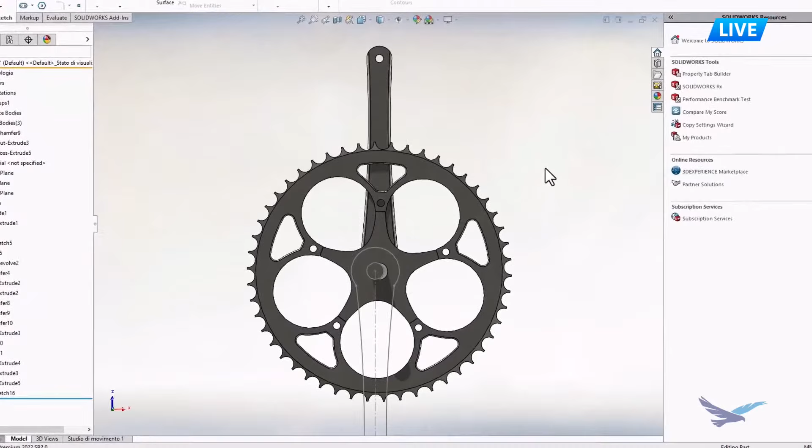Looking at the first two, again, minimizing our mouse movement. One way to do that is with the shortcut bar, clicking S with your keyboard. From here, I can customize this to the features that I want. I can resize it. Maybe you want it to be a little bit more of a square or rectangle. We can change it, and then begin to populate this.

But you see that there's a command search now available. If you haven't used command search before, as long as you know the name, for example, maybe I'm looking for a center line, maybe they've moved it. This does one of three things. I can click on the eye to show the command location, it'll have an arrow there, or I can click on it to activate it.

Or I can even left click and drag it to my command manager and customize it if it's a frequently used feature. Now that same functionality is right in our command search. I can do that same thing, click on that plus button to insert the command, or click on the eye to show the command location too. If you prefer dragging and dropping, you can do the same thing to customize your shortcut bar.

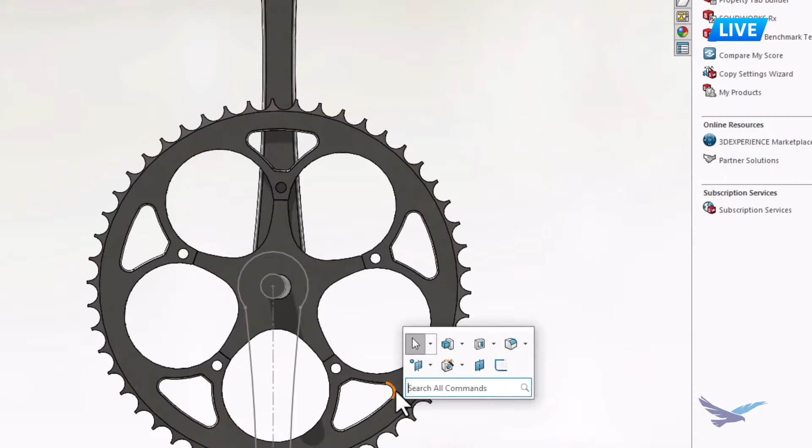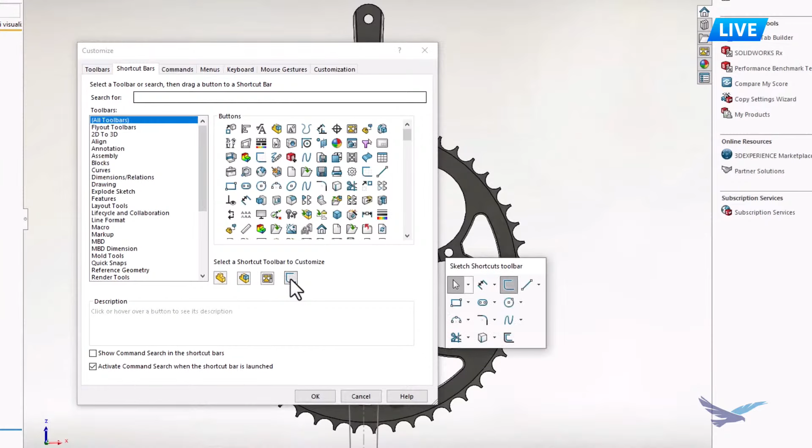Now say, for example, you know where everything is, right? I even forget where things are. But you can go into Customize and turn this off. If you decide you don't want that in there anymore, it's taking up space, you can go ahead and still resize it as you need. Keep in mind, in this Customize is where you're going to add additional features onto there, whether you're in a part, an assembly, a drawing, or even a sketch—it's context sensitive. So that's our shortcut bar, and then also our command search.

But I also wanted to show one other thing here too, different ways that we can draw lines, different kinds of lines. So we can activate our line tool, and one thing to pay attention to here is if I click the Alt key, there's an underline now on some of the letters. If I go Alt H and Alt C right now, I can create a horizontal construction line, a keyboard shortcut instead of having to toggle it. That same functionality is also going to work if I want to apply relations.

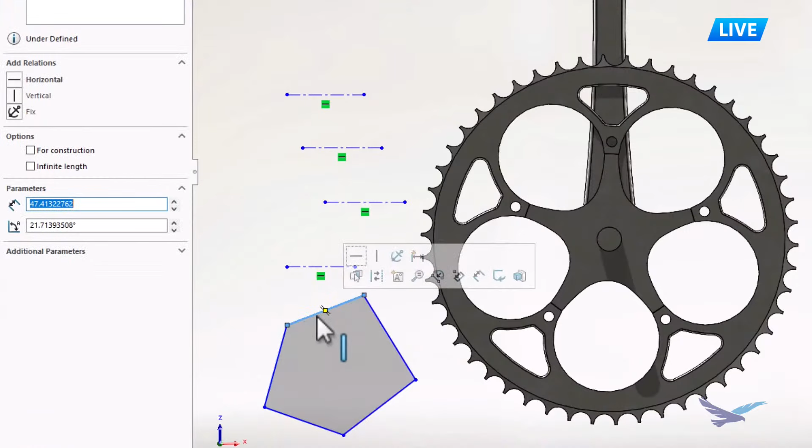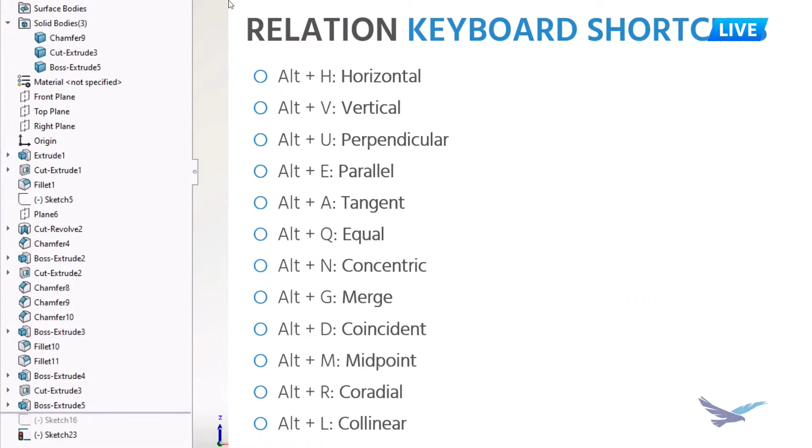So say, for example, I'll do an as-sketched profile. We'll sketch out some of these lines with the point-to-point click. I'll click on this line, and if I do that same thing, Alt-H, I can make this line right here horizontal. I can obviously click on the context menu to make it horizontal too—this is just another way to get that done. So here are some of the different shortcuts we can have for our relations, like perpendicular, parallel, concentric, midpoints, and so forth.

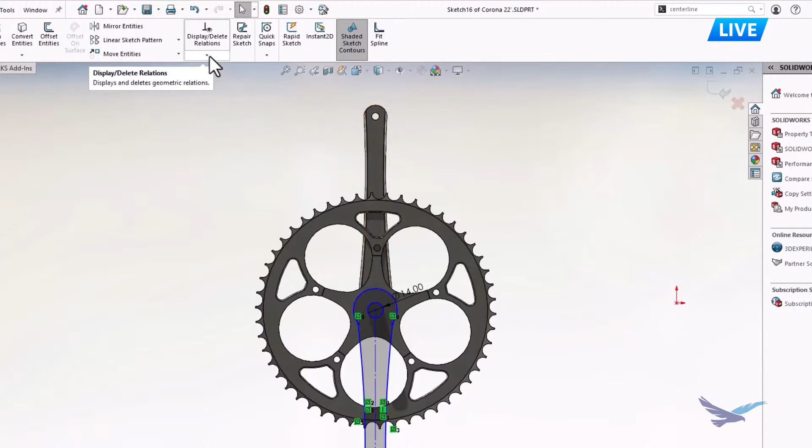From here, we're going to take a look at number 3, fully defined sketch. So editing this sketch, we have some dimensions in here, but if I want to just quickly add dimensions, I can go to the drop-down menu here and go fully defined sketch. This is especially useful when you want to quickly add some relations—you can choose which ones you wanted to infer, and also choose where it's dimensioning from, both horizontally and vertically. Once you do, I can press the green check and it adds those dimensions in.

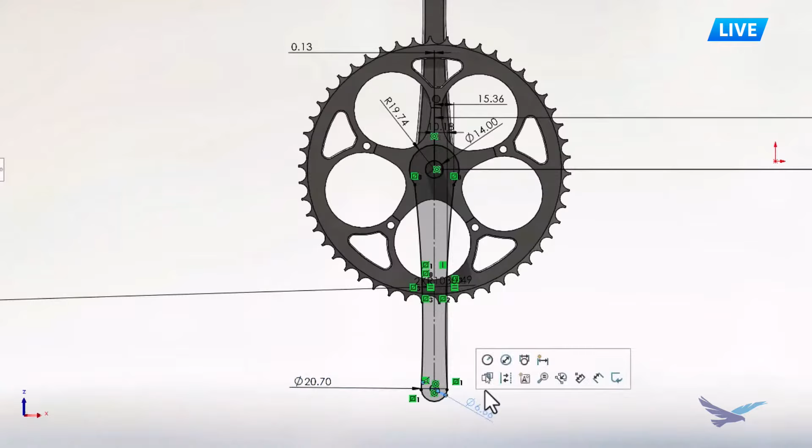It doesn't change your sketch geometry at all. Then from here, you can look at the dimensions and see, hey, is it correct? Did it create the ones that I expected it to? I can move them around, delete them, and adjust them to make sure that they're not in the way. Quick tip, if you wanted to make this radius a diameter, if I click on it, you'll notice in the menu I can quickly toggle to a diameter now. It also works the other way too, so if I click on this, I can make that a radius.

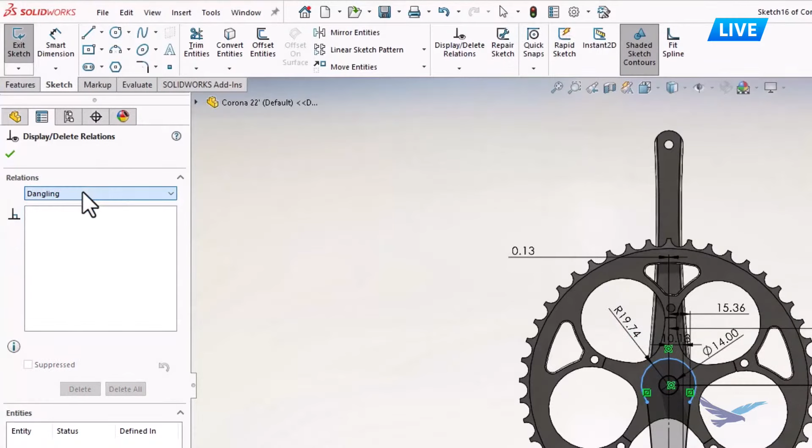Now say, for example, you want to modify some of the relations or dimensions that were added in. I can go to my display, delete relations, and this is a quick way where I can say, you know what, don't need any of those anymore—I can delete all of them. It's also helpful to find anything that may be dangling inside your sketch, or over-defined. I also use this function, clicking the D key, I can bring the confirmation corner over there.

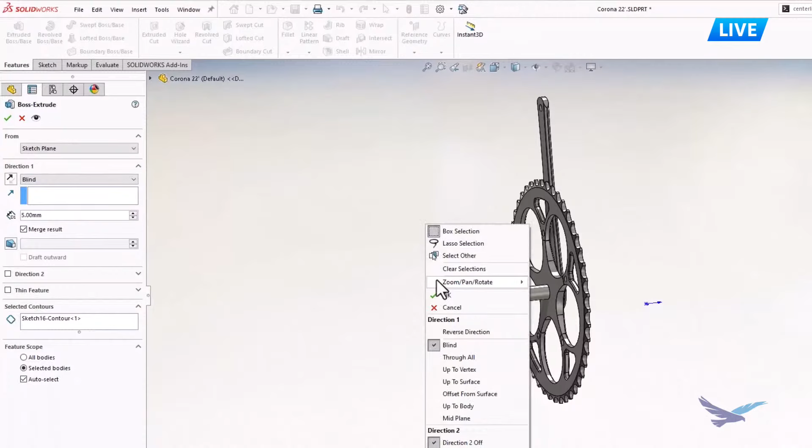I'm going to go here, do a quick extrude of this sketch. I'm going to click on it, and on the left-hand side we can definitely change my direction, change my end condition and the value. Or I could just right-click and say reverse direction. Maybe I wanted to specify that this is just this contour here, so I'll leave that open.

Once it looks good, I'm going to use my mouse gestures to confirm it. That's another shortcut there, utilizing mouse gestures, which you can customize as much or as little as you want. In the same section where we customize the shortcut bar, I can choose, for example, a green check, which accepts changes for sketches, and also enters or exits a sketch.

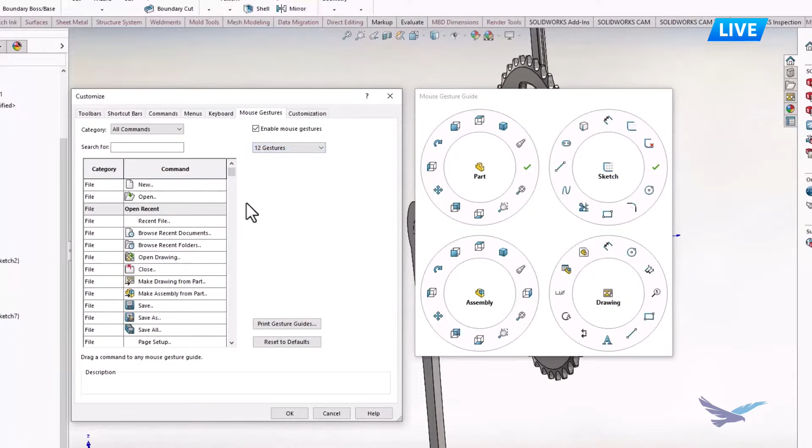You can do this for parts, assemblies, and drawings. You can choose how many gestures you want, or if you don't want gestures at all. This is the list we can add to. So say, for example, I want to add a green check when I'm in an assembly. I just left click and drag it over, and now it's available when I right click and go to the right.

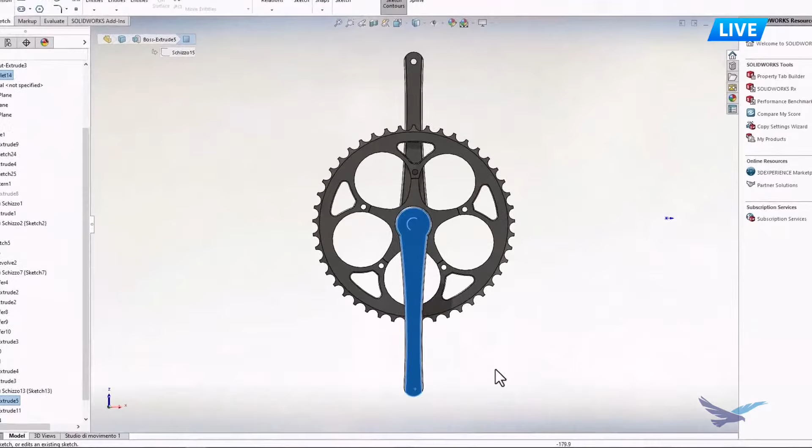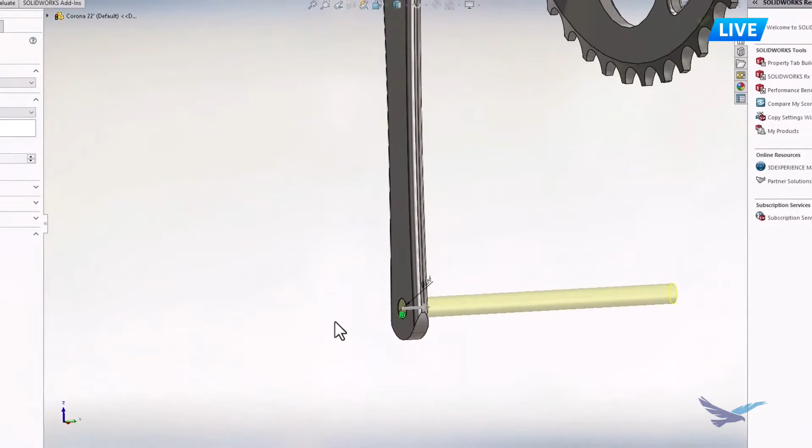We've added in some fillets, and we're going to use mouse gestures a bit more if you haven't used them already. I'll go to my circle tool, again all customizable. I can pop in this circle, go straight to my dimension, add that in, modify it as needed, using our shortcut bar. I don't have extruded cut in here, so let's activate it. Looking at this cut, I want to make sure it goes all the way through. I'll press OK. So, utilizing mouse gestures again to reduce the amount of mouse movement we have when working with the part in a sketch.

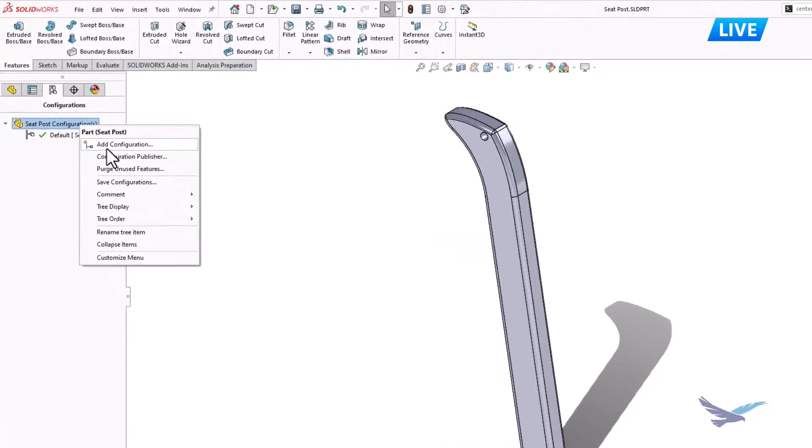Now, configuration tables. I can go to my configuration tab and add or look at my configurations. There's new functionality in 2022 where I can go to my settings, under General, and if you scroll all the way down it says 'create configuration tables on open.' So if I had that checked on, we'll right click here and go to add configuration. Say, for example, we'll make a different version of this, maybe a little thicker.

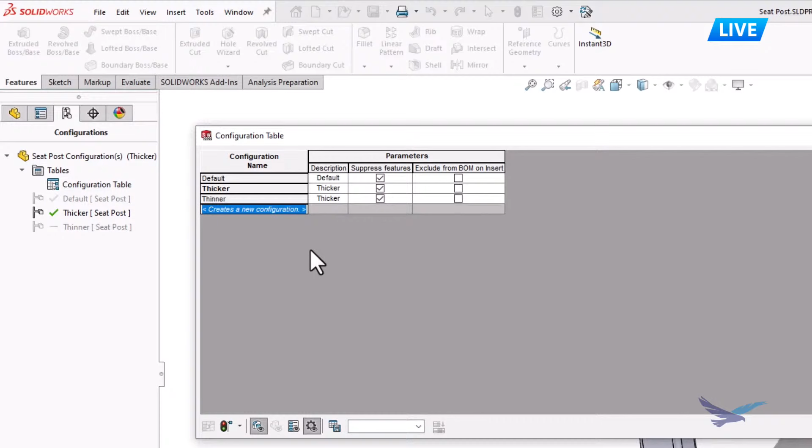As soon as that happens, a configuration table gets created. You can right click on that and show the table. If you've ever configured a feature before, this looks similar. This is also a great way to add new configurations. It gives me a high-level overview of what's going on in the part or assembly, and I get these parameters in here. I can also customize it.

So say, for example, I want to add in this cut extrude. I can double-click, add it in. Same thing happens, for example, with this fillet. Maybe some of these configurations have a different fillet size, so I can double-click and add that dimension in as well.

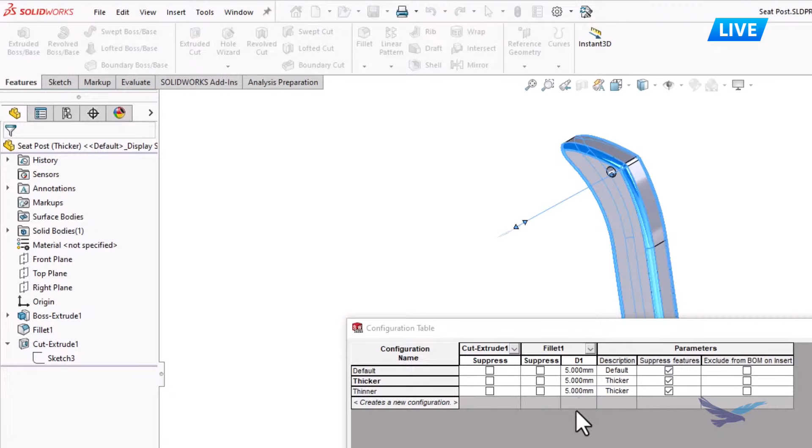We described this as a thicker and a thinner configuration, right? That's what we created. So maybe it makes sense to grab that dimension in there too. Double click, add that dimension in, and let's change it right in here. I can make this one 30, I can make this one 25. Again, not having to go into the configuration to do this, I'm also going to change the fillet size. Say we'll make this about 6, and I think we'll go with, let's do 4 here. Yeah, that works. We're going to apply the change.

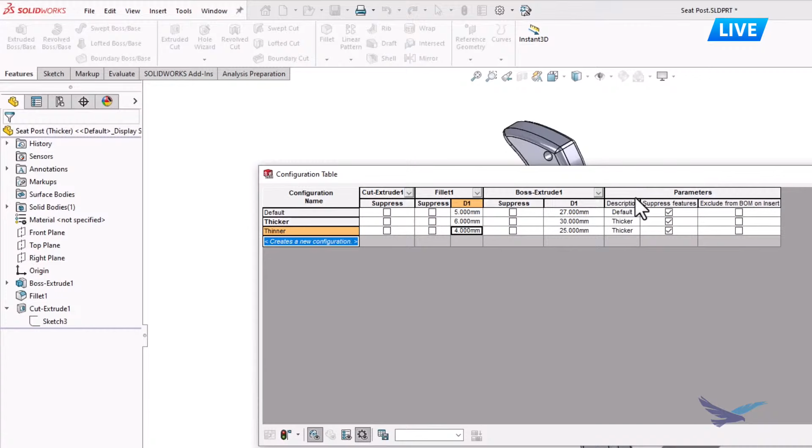So it creates that new configuration and gets those dimension changes. A couple other enhancements with our configuration table: there's now hide and show sketches and features, like a filter, so if I wanted to hide anything that was a feature or a sketch from the table, I can do that. There's also configuration parameters, the options that when you right-click on a configuration you'd go to Properties for, like Suppress New Features, or in an assembly Suppress New Features and Mates, the description. Instead of going through each one of those configurations, it's inside of the configuration table.

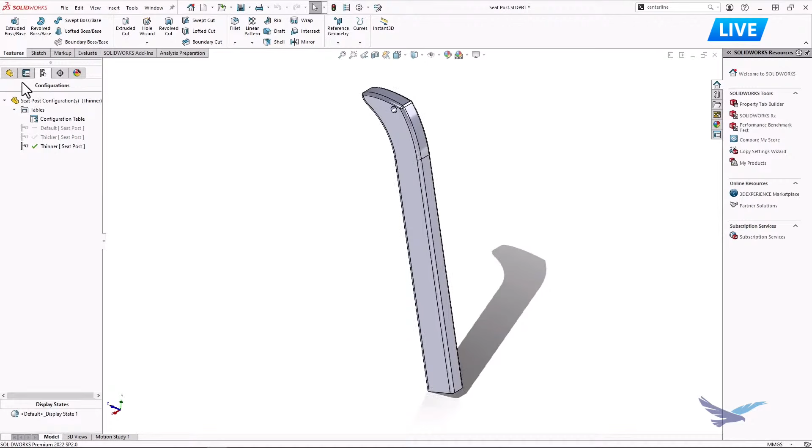Lastly, block model edits. You can see it turns that pink color, which tells you it's activated. What that does, like the name suggests, is block model edits, manual edits. So if I go to this feature, that fillet that I blocked, and double click on it, I get this message: unable to modify this value because the model edits are blocked in the table. So what do we do here?

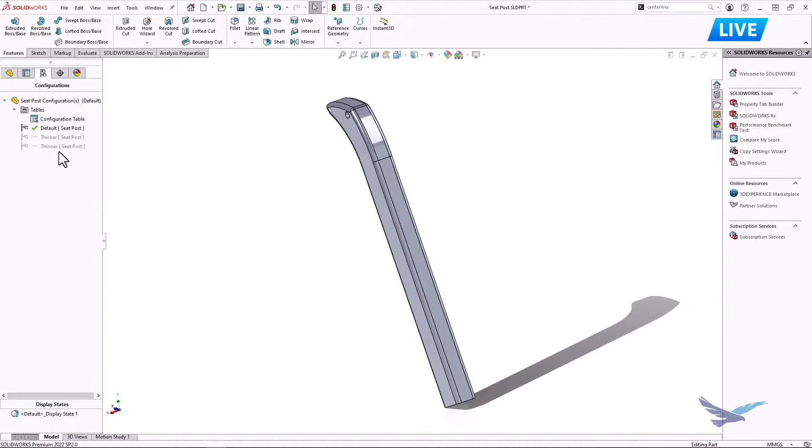Now we just undo what we did. I'm going to go to my configuration tab. Say, for example, later on I'm going to remove some of these configurations, we'll talk about that. But I'm going to go into my table, and best practice is just to right click and allow for those model edits.

You'll see it clear out, right? I'll be able to change it manually like I did before. But what happens if you still have it blocked, and then you decided, you know what, I'm just going to delete these configurations, I don't need them anymore? Sometimes what you'll find is you double click on this, and it may think you're still blocked. It's one quirk that I found.

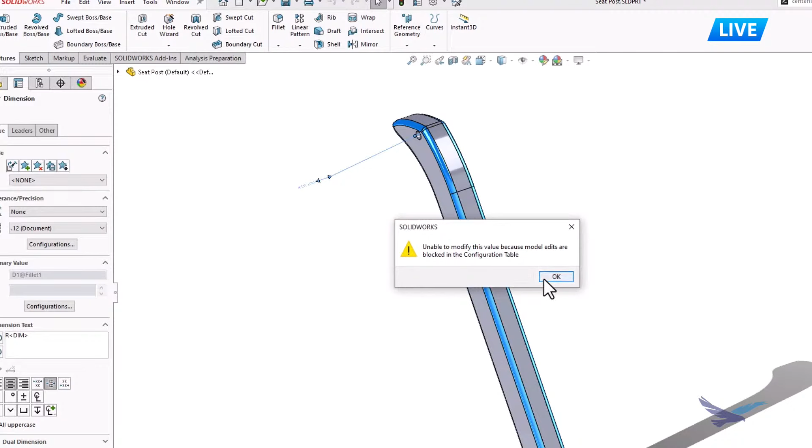If that happens to you, the solution or workaround here is to add a configuration, maybe one that you don't need, for example, and you get your configuration table back. Now, if you wanted to check to see if maybe it released it, in my case it still looks like it's being blocked. So the simple solution is to go to that configuration table it creates and then allow for those model edits.

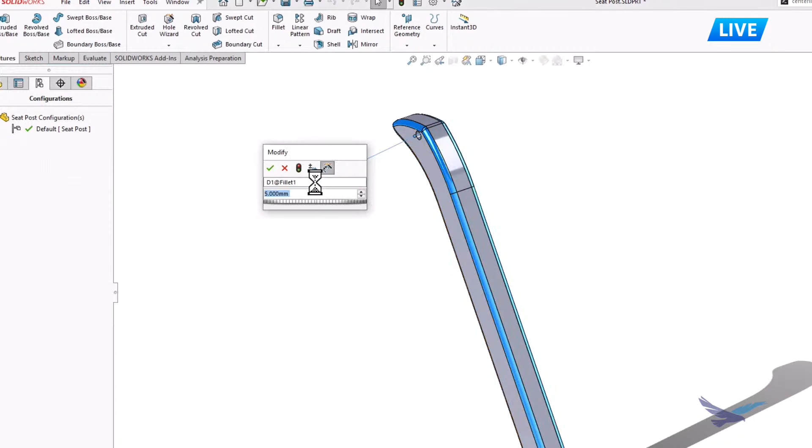We'll apply it and press OK. Maybe we'll remove that configuration if we don't need it anymore. And we pretty much did it for the configuration table. Now you can see that we can edit our dimension. So just keep that in mind.

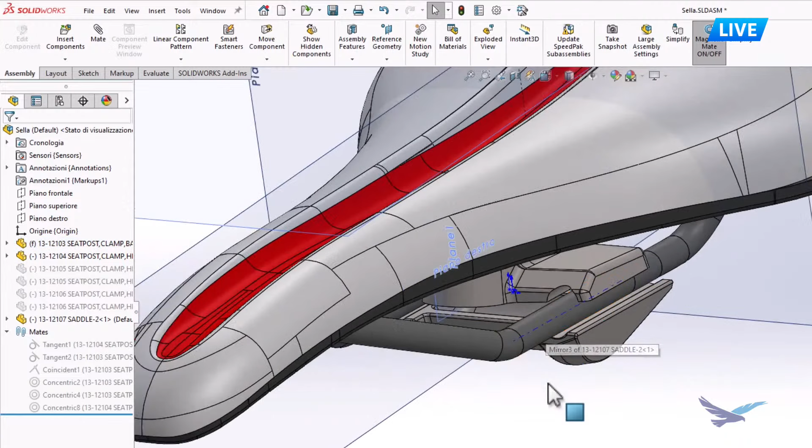Looking at mates, that Damon talked about, there are lots of different ways to mate. We can go in the mate menu, we can do smart mates and quick mates. You can also, if you like mating the reference planes, click Q on a part in assembly, and it opens up and shows you the reference planes instead of you finding it yourself. In this case, we'll just make a concentric mate. I'm going to select my faces, hold down Control, and we'll access our quick mates.

Now, say I want to make this face right here parallel to the other face. I can rotate, I can right click, and then select Other, which allows me to select through it, to select other faces. Another way is the component preview window. When I right click on this, I go to component preview window, and it opens it up in another screen, and I can navigate around without affecting my assembly.

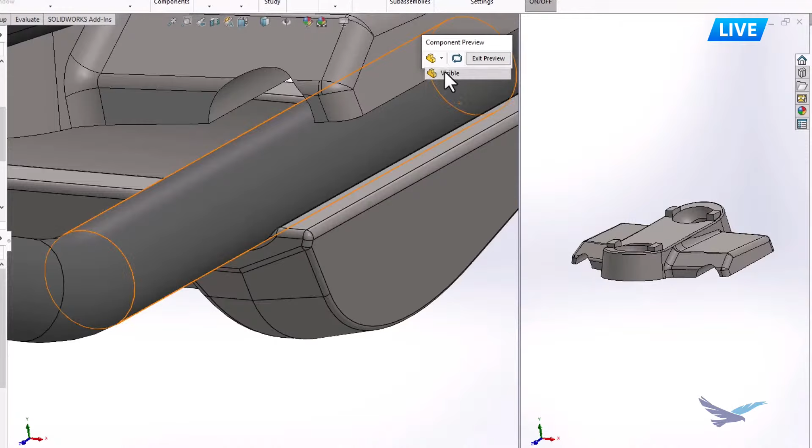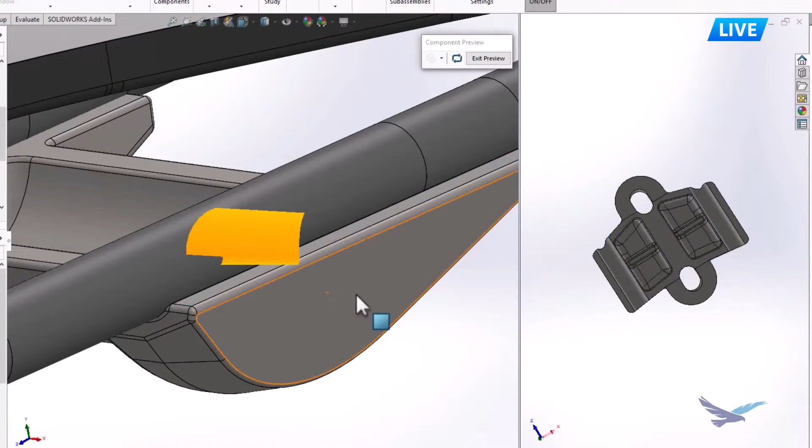I can also change the display style, the behavior for that part that I previewed. I can make it wireframe if it's easier to select. I can also make it transparent, or make it hidden. I can still select it on the right-hand side. So I'm going to select that face without rotating the assembly, hold down Control, select that other face, and as if it was already inside there, not hidden, I can go ahead and add in that mate.

That same functionality also works with isolate. So if you right-click and say I want to isolate these two parts, I have wireframe, and this is for everything else that's not isolated, so I can see where this is in regards to the assembly. I can make it transparent if that's easier to see, or just hide it like isolate would usually do. We'll add in this concentric mate to finish up the assembly, and we'll exit out of the isolate.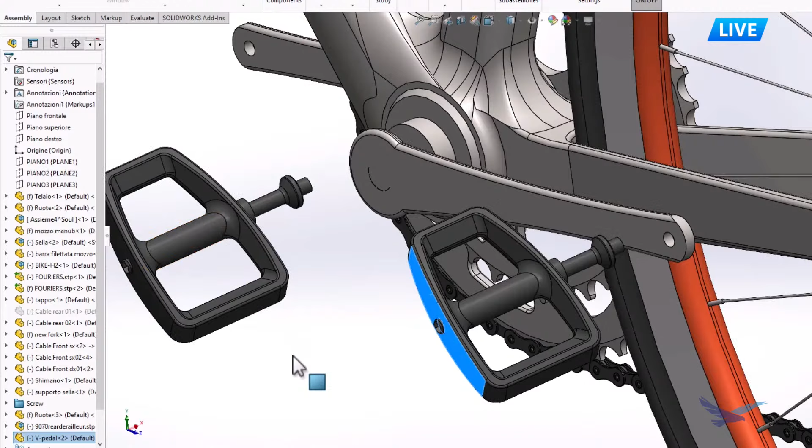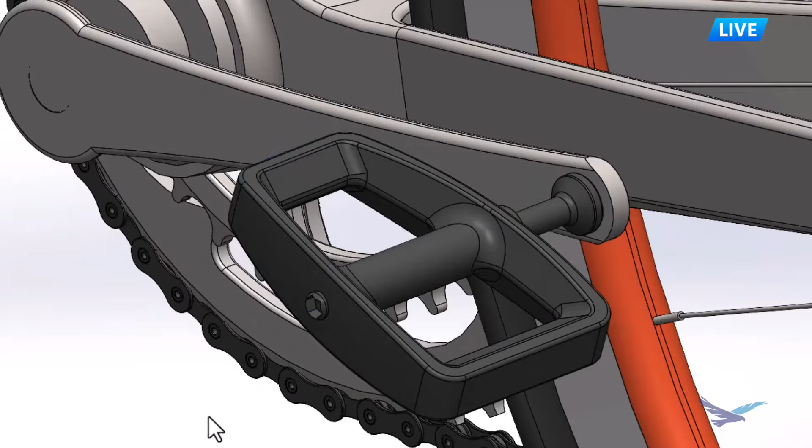Another tip I have is smart mates. But first, I'm going to hold down Control and drag this pedal, because we need two pedals. With smart mates, the Alt key is going to be important. I like rotating it so I can see what I'm dragging and what it's going to. So I hold down Alt, left click, and drag that edge. It creates that peg and hole, creates both a concentric and a coincident mate - same result if I did it manually, but just a different way to do it.

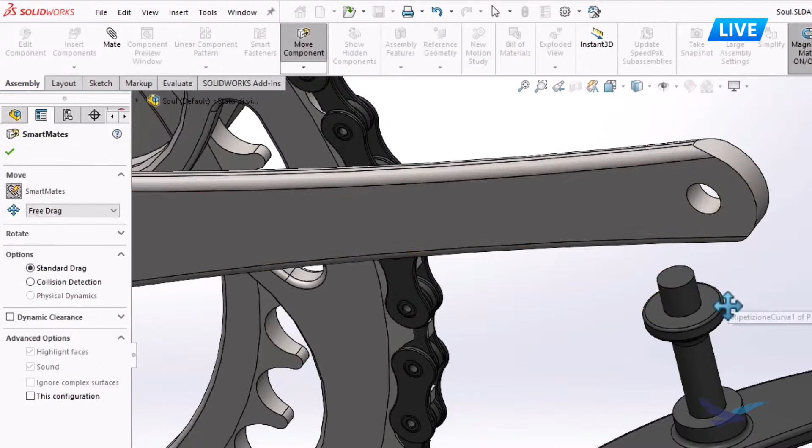Now, say you don't like dragging, maybe you just like to click instead or go through a menu. You can access smart mates through the move component. Have you ever done collision detection before? Same area - click on smart mates, and now all you have to do is just double click on that edge. No need for Alt, or to drag it, and then just click on what it's supposed to mate to. If I had done Alt, I can click Tab to flip the orientation.

In this case, it's as simple as going into my mate menu, looking at that concentric and that coincident mate, and then going, cool, I just got to flip the mate alignment. So with the right click to get that in position.

Looking at drawings, I want to insert predefined views here. It's pretty much like working in reverse. I'm telling it I want this orientation, and I'm going to decide if I want annotations brought in, display styles, and what the scale will look like too.

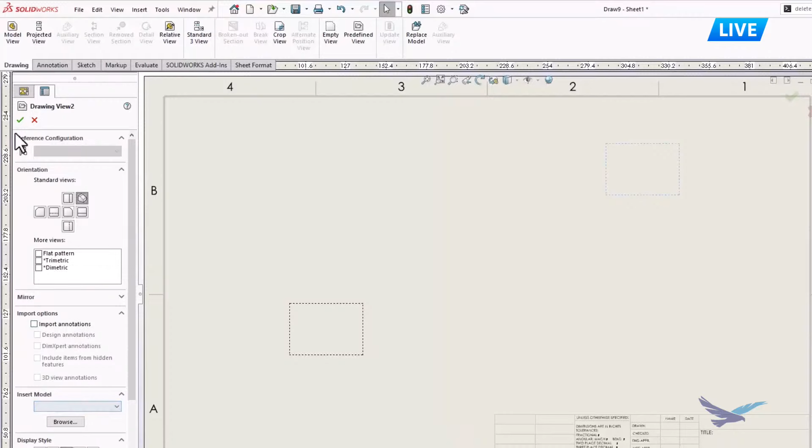I can click Enter to reinsert that command, and say, for example, we'll go isometric. New enhancement here is being able to also insert a flat pattern for sheet metal parts. Same options apply, and you can take that view and project it. We'll go up top, we'll go to the right to get those views, and those will link to the parent view.

Now, to use this in a template, I'm going to go ahead and save this out. Make sure you're saving in a file location, or tell SolidWorks where to look for it. I'll go ahead and save it.

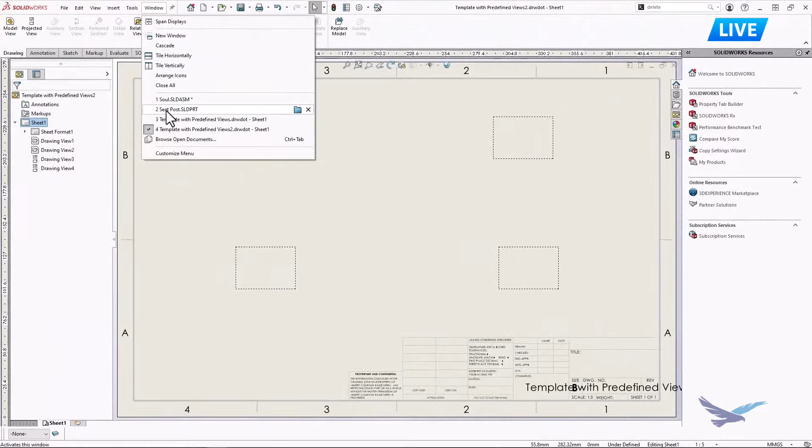It's a DRW DOT, and we're going to look back at that seat post and just create a quick drawing from there. It's a quick and easy way to define which views you want with the options that are there. You can see as soon as I create it, it automatically creates the views.

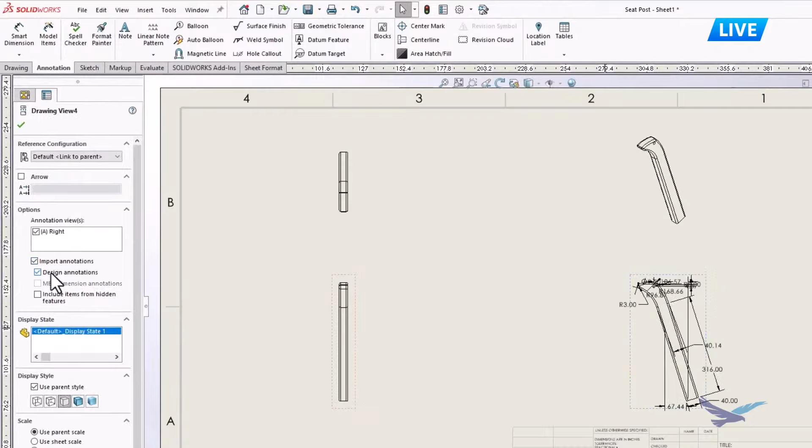If I wanted to insert my annotations, I can do model items or go individually into each view and insert them. It's a little bit of a jumble, but I can take this radius. Remember, changing that radio button, the radius to diameter, same thing in drawings. I can do the same thing here.

I'm going to grab all of this and use my dimension palette to space these out a little bit more. If you ever move your mouse, you'll lose it, but if you hold down Control, you'll see it brings it really close to your mouse now. Click Auto Arrange and it'll space these out. I can still move them afterward and adjust and place them so it's clearer to read.

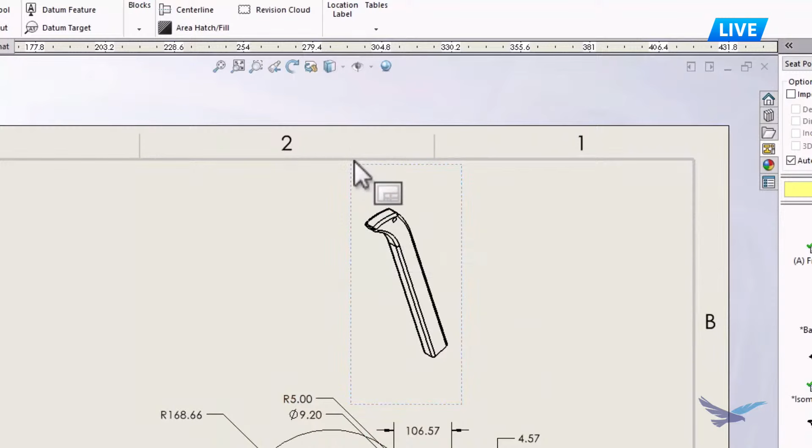Another quick tip: if you wanted to place this part in a different 3D orientation, but maybe you don't have that view inside your part, I can go in here to 3D drawing view and just rotate it as if I was in the part, or the assembly. Grab the orientation I want, then press my green check.

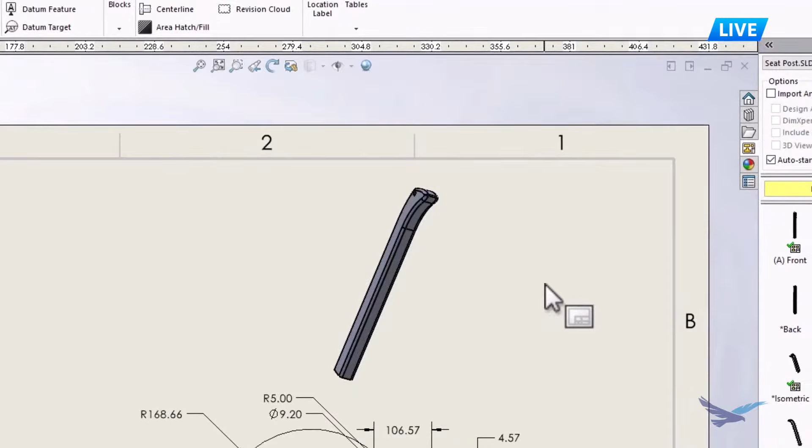Side note, for my view palette on the right-hand side, if you haven't used it at all, and say next time you want to open this up and make it faster, you can clear it out.

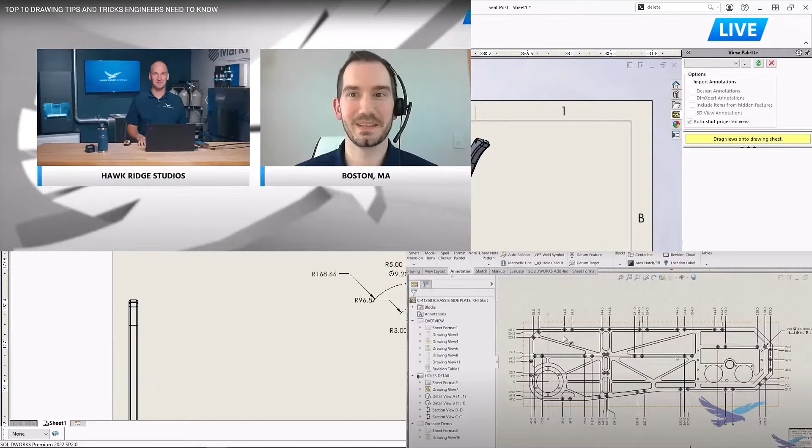Now, say we want to go and do a quick render of this. Before I do the render though, I'd like to maybe modify some of the colors, because whatever I do in here, it's going to translate over to Visualize. So for this fork that we'll look at later, I'm going to change the appearance.

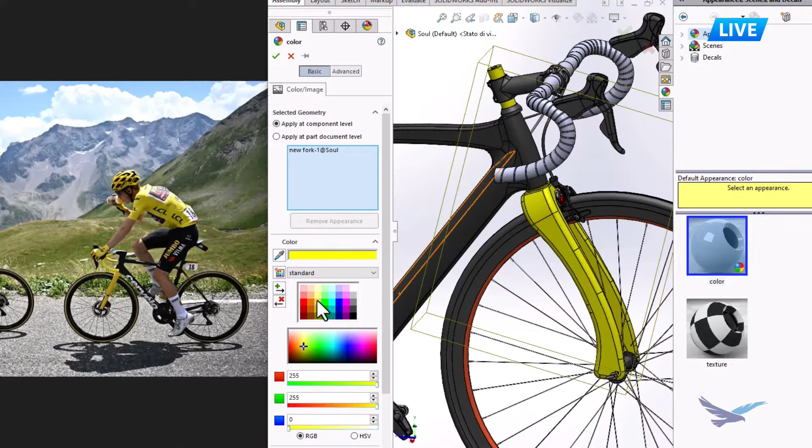I'm going to see if I can get it to match Jonas's bike. I can go in here and click on this yellow, and that looks pretty good, I kind of like that. But another way to do it is to use the color picker. I can just left click and take that eyedropper and see, oh, do I like that yellow? It's a little darker. I do like the initial yellow, so maybe we'll go with that.

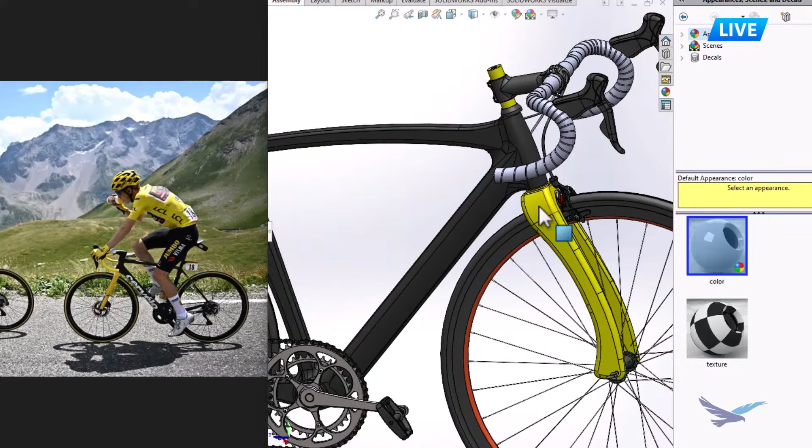If I wanted my handlebars to be the same color, I don't have to go through that same process. I can just right click on that fork, copy the appearance, and simply paste the appearance right onto my handlebars.

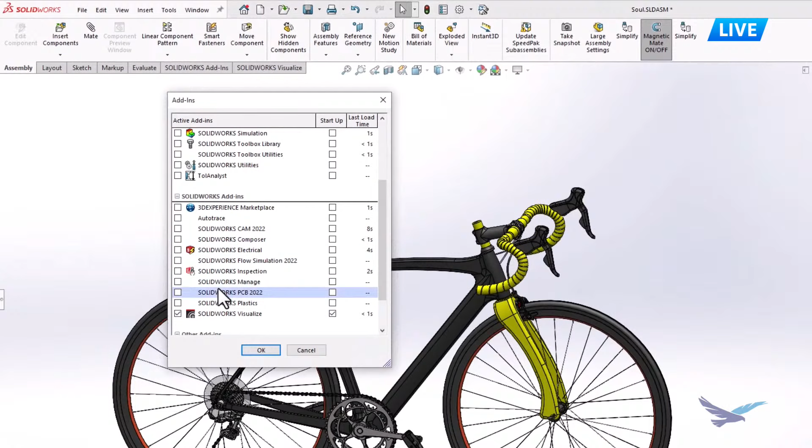So from here, say now we want to begin to do our render. We're going to take this into Visualize Standard, which is available in SolidWorks Professional and above, Professional and Premium. I'm going to turn on the add-ins, and we'll just go Export Simple here. It's going to group all of our appearances together. If I click on my fast render speed, it's a good compromise for both speed and quality.

And I click on the space bar. When you do the space bar, you pretty much have these five steps. The import is if you need to bring in anything else into Visualize. In this case, we're good. If you go to your paint, it's like your appearances in SolidWorks.

I can simply drag and drop from whatever colors are available in the project. I can also go to a library that's available locally or on the cloud if I need more colors. Maybe the inside of these wheels, I want to make them yellow too. So like SolidWorks, we'll just drag and drop them into the interior of the wheels. I like a yellow seat too, so let's left click and drag it onto the seat.

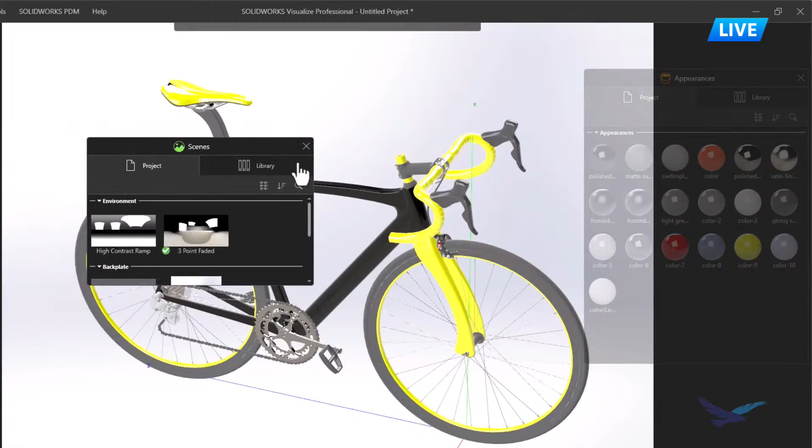From here, we'll go left to right into scenes, kind of like your background. That's your environment, and it affects the overall lighting of your model as well. Later on, we'll talk about brightness with cameras. But like appearances, I can drag and drop these in. There are certain scenes available inside the project that we can bring in, and in the library there's plenty available locally or on the cloud as well. The green check indicates it's already downloaded, and again it's activated with just a simple quick drag and drop into the background.

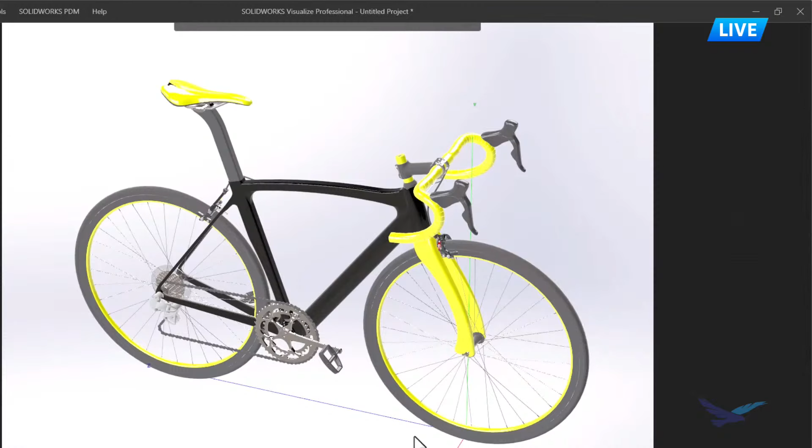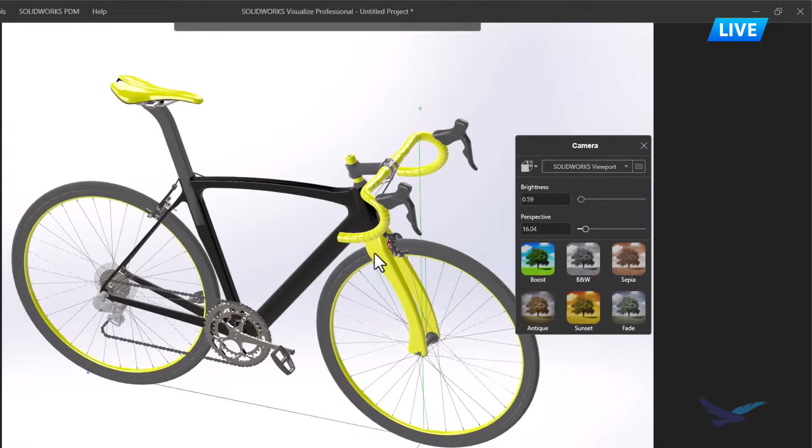Cameras, number 4. We can adjust the brightness with the slider on the right-hand side or left-hand side more incrementally. You can also type in values if you prefer. Change my perspective with the slider on the left or right, or input our values. Last thing, you'll notice I have my filters like boost or black and white, and I can apply those to my overall model too.

Last thing, right click on render and you have different render profiles that you can utilize to begin creating your render.

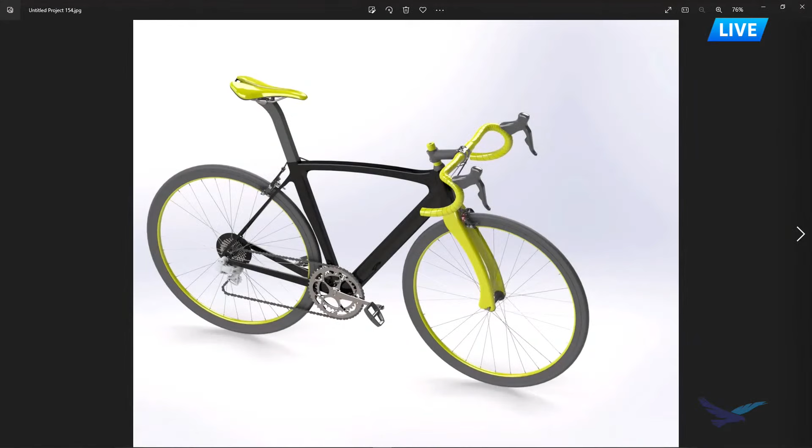Now looking at this project, maybe we'll take a coffee break, grab some water. We've actually run this already, and it takes just a little under about 20 minutes. So right now it's saying 32 minutes, but when the actual thing gets completed, we're looking at under 19 minutes. Taking a look at some of the renders, again, a very simple 5-step process to create this render.

So that's just the tip of the iceberg.

For number 8, we wanted to circle back to customization. You do all this work setting up your command manager, your shortcut bar, setting up how you want your mouse gestures to look. What if you do an upgrade? What if you move to a different computer? That's where number 8 comes in, the copy settings wizard. This allows you to save your own personalized settings, and you can choose what you want to save out, whether it's system options, keyboard shortcuts, mouse gestures, and any customization. It saves it as a registry key that you can save out and move with you to the new computer, or after installation, use the same menu to restore your settings.

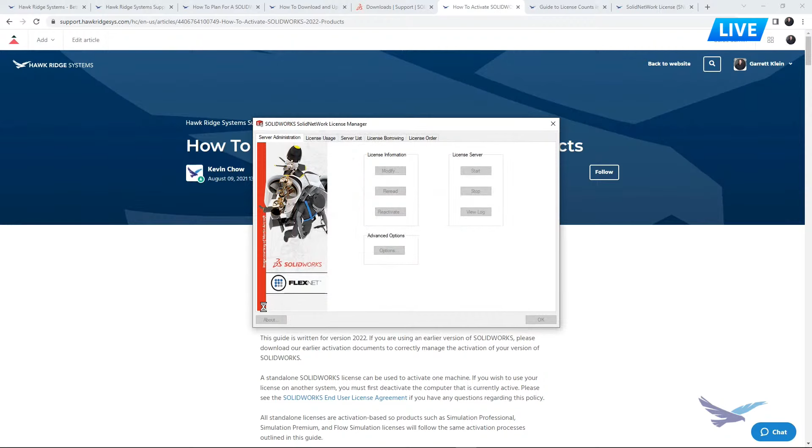How that's done is you simply get on the server, go to the license manager, and you can click on modify. If you're moving to a new computer, you use that top option to move. If you're reactivating on the same server, that is, you used that server before and just need an update, you use that middle option. And if you just want to see what licenses you have, you can use that bottom option. So it's pretty straightforward—essentially just next, next, next through all of those. It's a really easy thing to do.

Good article, another one here from Daniel having to do with licensing. This is a very common question. In this scenario, if you had 6 licenses—2 professional, 1 premium—what you're going to see in the license manager sometimes confuses people. You'll see 6 standard licenses, and when all those are consumed, you might still see that 2 professional and 1 premium are still available. It really depends on which features the users are pulling out and which licenses are taken. Somebody will always take a standard license if they're pulling a professional or premium, but then they'll take those additional features if they're using additional functionality.

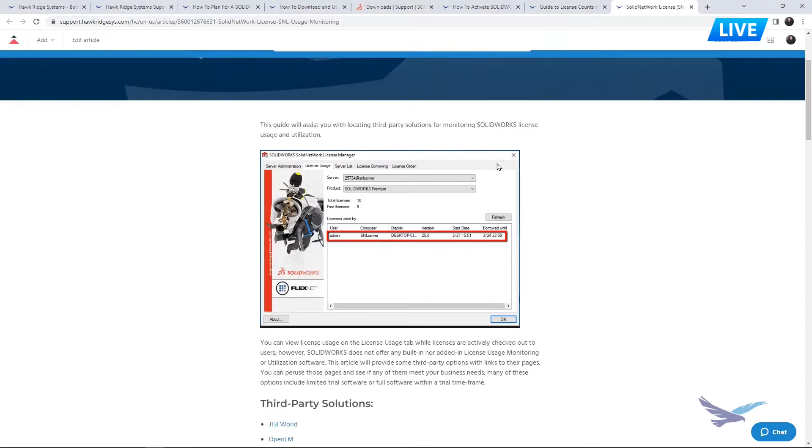The last one I wanted to cover has to do with license monitoring. You can go to the license manager and look at what current usage looks like, but you can also come in here and there's a log file. If you look at the article, there are a couple of different pieces of software you can use to parse a log file to get a good idea of what your usage actually looks like.

I'll often use this with customers and show them, if people are being denied a license, which users are being denied, who's using the more advanced features, and you can even see information about how long each user has been using a specific license. You can go to that and save it out. It's just a really great tool for getting good details about usage.

Yeah, all of that within the knowledge base, right? It's an incredibly important resource, and one of the things I love about it is that it's constantly being added to and updated, especially for frequent and commonly asked questions. Yeah, absolutely. Awesome. Thanks, Garrett.

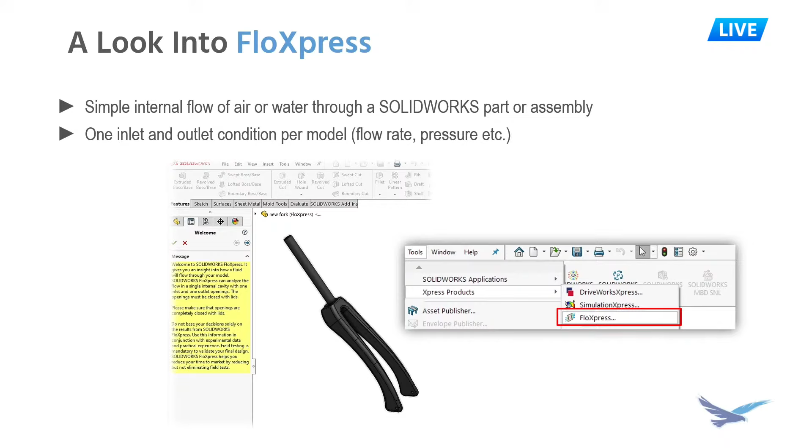This is going to be a way to get a different kind of visual related to fluid flow. If you're not familiar, FloXpress is a quick way to do internal fluid flow analysis inside a SolidWorks part or assembly. It has some limitations, but basically it's set up to give you a fluid flow analysis of anything that has an inlet and an outlet. That could be a piping system, a valve, or maybe a hydraulic brake fluid line on a bike. But with a couple tips and workarounds, I'm going to show you how we can use it to do a quick aerodynamic analysis of one of the components on the Soul road bike.

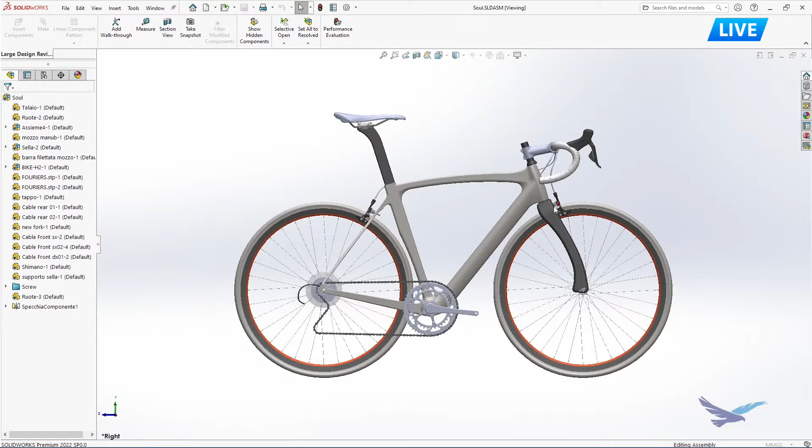You can see I've got the road bike assembly open here. I'm actually in large design review, which is another newer SolidWorks feature that helps you quickly open up large models and review them. What I want to do here is use FloXpress to do a quick aerodynamic check of the fork. This is kind of an updated design someone had done, trying to see if it's a little more aerodynamic.

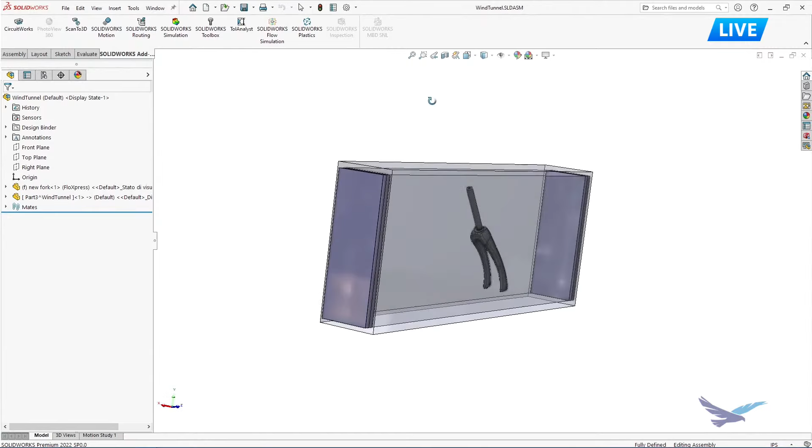There's a requirement for FloXpress: you have to have some kind of enclosed geometry with an empty space in the middle. So if I'm trying to run a basic aerodynamic study, I can take this new fork and drop it into an assembly, which is what I've done here. I made a SolidWorks assembly called Wind Tunnel, and made a new part from the assembly using the in-context design features. I basically made a rectangular extrude, sketched out a rectangle, did an extrude in both directions, and capped the ends with a couple more extrudes. That creates this sealed volume, which is the requirement for using FloXpress.

Now I can access it—you can see it under Tools, then Xpress Products, and that's where FloXpress is located. There's no installation required; every license of SolidWorks will have that available from that drop-down menu. When you click it for the first time, you'll be asked to enter what's called an activation code. This is true for any of these Express tools. It's pretty easy to get—there's going to be a web link there.

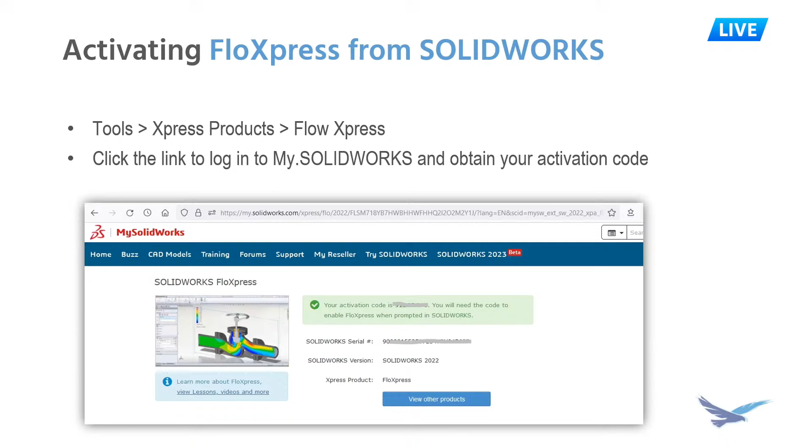If you click that, it will take you to a website called MySolidWorks, a central resource for tutorials and support and lots of things from SolidWorks. You'll hear more about that in our later segment from Frank. As soon as you log in, you'll be presented with an activation code you need to use FloXpress. If you've never logged into MySolidWorks before, you can create an account. You'll just need to put in your SolidWorks serial number, and some of those knowledge base articles that Garrett showed you will probably help you do that.

So now once I've activated it, I click that FloXpress tool from the dropdown, and you're presented with this welcome message on the left-hand side. This is just a reminder of what FloXpress is and what it can do: simulate fluid flow inside your model with one inlet and outlet.

So what I'm going to do is go through the wizard, and I'm going to set up these inlet and outlet conditions on those front and back faces that I defined to run this thing.

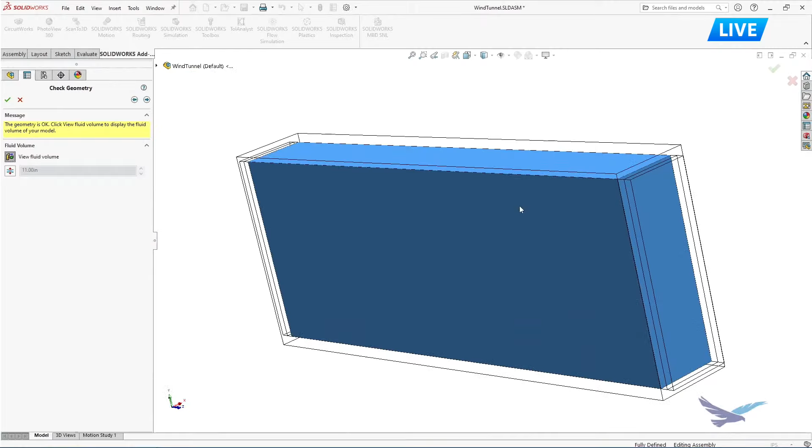Now, the first step in the FlowXpress wizard is just to make sure that you have geometry that's going to work. There's a button that will show you the fluid volume. You can see here, it looks like I know how to make an extrude feature, thankfully, and I've made this sealed fluid volume, showing in blue there.

Then there's an option right below that called smallest flow passage. That's for making sure FlowXpress can capture any of the narrow channels in your model and simulate them accurately. On the fork, near the top of where the front wheel would go, I think they call that the crown, that looks to me like the narrowest passage. It's like 2 inches, I think. So I'll plug in 2 inches there.

At the next screen, I just select fluid. In FlowXpress, you can choose air or water, and luckily air is what we need in this case. Of course, the full version of this tool, SolidWorks Flow Simulation, has a big library of fluids, and you could create other things, add to it, and have a lot more options. But for right now, we'll pick air.

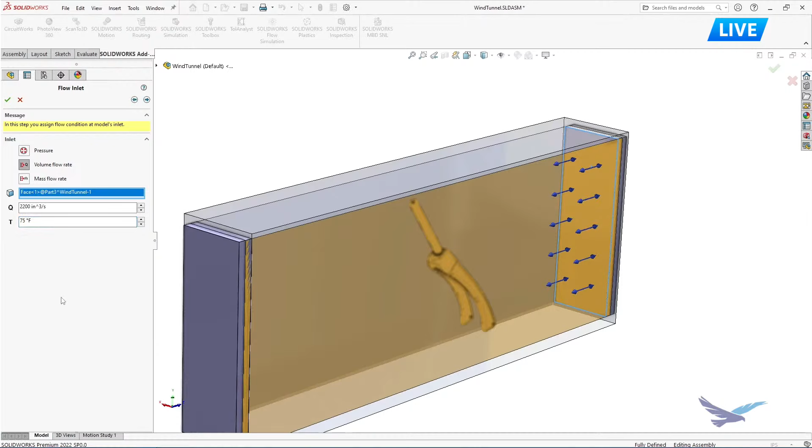Then I can plug in the temperature of the air coming in, and that's useful because, as you probably know Ricky, the properties of fluids like air or any gas change with temperature. So if it's a warm day for the Tour de France and I want to make sure that's accounted for, I'll plug in the temperature and now the air has the right properties.

Similarly, I needed an outlet condition on the back face, so I'm grabbing that face again with the select other command. The default there is just to define atmospheric pressure, and that's probably good — I don't want to change that in most cases. It's just saying the back is an opening to the exterior environment. If I was at a real high altitude race or something, maybe I'd change that pressure.

Otherwise, that's all I need for setup: one inlet condition, one outlet, and the fluid.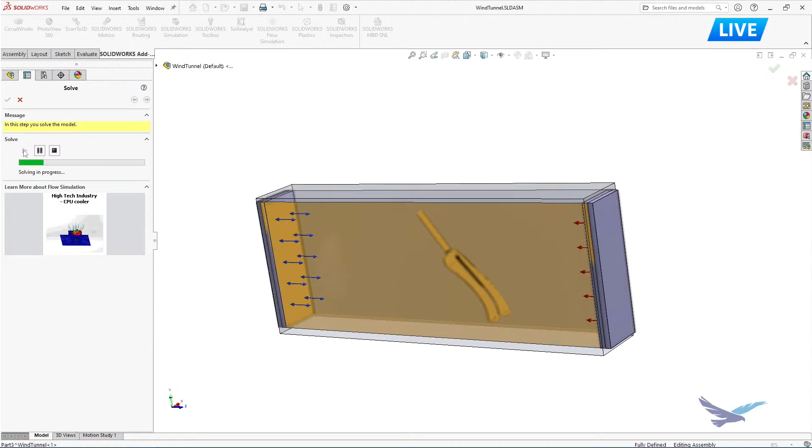At basically the last screen here, there's a button you click, looks like a play button, and that runs the simulation and also does the meshing and all the other stuff needed in the background. This will take probably a minute or so, depending on how big that fluid volume was and also what I typed in for that smallest channel setting, again, 2 inches.

So it's doing all the meshing and computation in the background. It's calculating the velocities and then the pressure field from that. While I'm not going to have access to the full suite of results that FloXpress is calculating right now, I will be automatically presented with the most important things — what we call the fluid stream lines. So you can see where the fluid's going and what the velocity is.

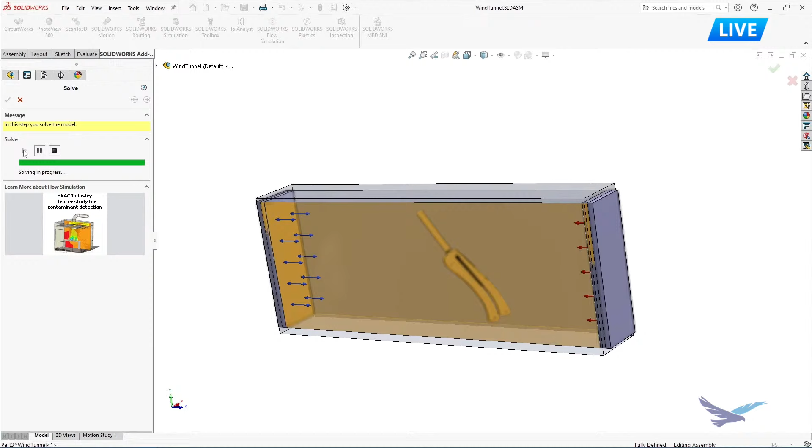And so that is what pops up here as soon as the analysis is done. So I'm just going to switch my view here to the side to get a better look at this.

And so what you can see is we've got these flow streamlines, and right now we have a display style called pipes being shown. So these are just like solid lines from the inlet going past the fork to the outlet, and they're colored by the velocity of the air. We can see right now some of the streamlines are hitting the fork and being diverted, but there's not a lot of detail.

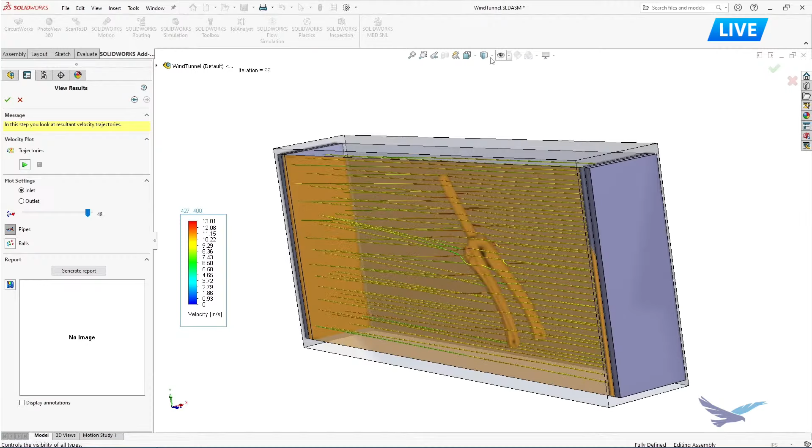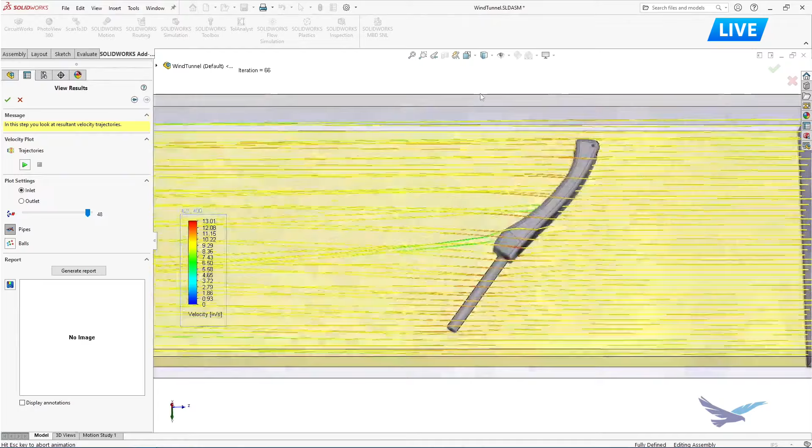So we can take that slider and crank it up to a higher value, go up to maybe 40 or 50 streamlines even. Now we're getting a little more detail, a better picture, especially if we go to a top view of how that flow is being diverted. It's just showing where those inlet points are traveling around the fork as they enter the wind tunnel. You can see right now most of those streamlines are being diverted to the outside of the fork, which is probably a good thing from a drag standpoint. You don't want all the air going into where the wheel would be.

And there are some other options. You can change the display style to balls, a spherical image. But otherwise, what you can do is take snapshots of these result images. You can turn on the little indicators here to remind you of what those inlet conditions were, and then click the snap image button to save that.

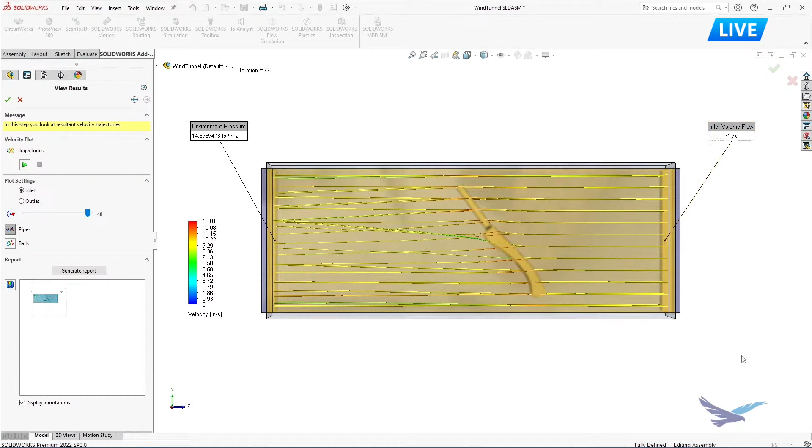So I've got a profile view here, maybe that top view again. It's got that velocity legend there, so we're in the range of probably 10 to 12 meters per second for most of the flow. And once I think I've captured most of the images that are important to me, I might change the display style.

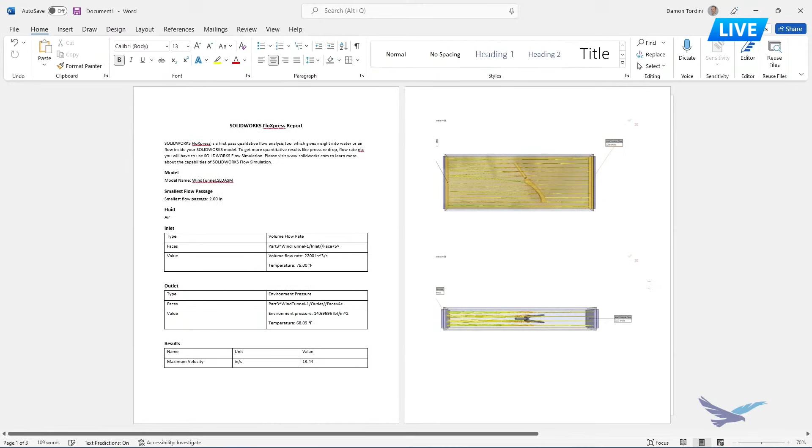There's one last feature that is not used very often here that's very cool, and that is the generate report button. That will take these images and basically auto-create a Word document for me with those result plots in there. And there's one extra reason why you'd want to use this generate report option - other than getting a summary of what you ran and the results, you also get a small table that summarizes the velocity and shows you the maximum velocity of your FloXpress analysis.

So this one was a maximum of 13.44 inches per second. And if you're familiar with aerodynamics, typically when flow is diverted around something like a wing, that tends to make the velocity go up and the sidewall pressure go down - that's Bernoulli's principle. But it probably means there's more drag. We don't get to see the drag force directly from FloXpress, but most likely if I'm trying to reduce the drag, I want to reduce that maximum velocity.

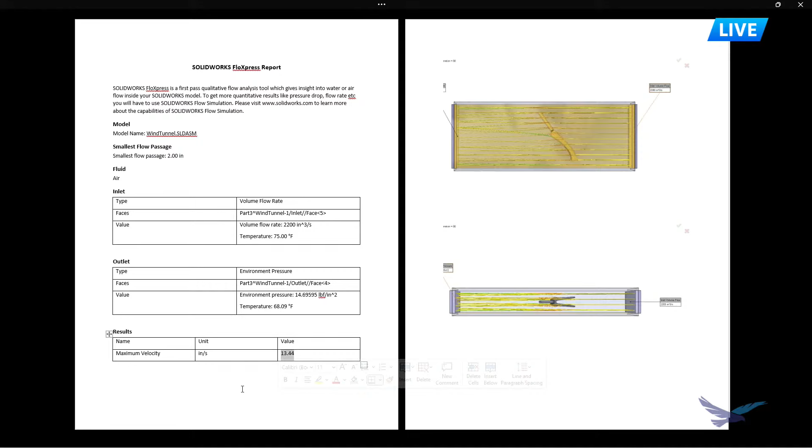So what I could do is try a design change - maybe go change the angle of that front fork in some way, maybe change the profile, and I could rerun FloXpress to see if that reduces that maximum velocity.

So just to summarize, as long as I enclose my part like this fork in some kind of solid body, I can run what is basically a wind tunnel test, even though FloXpress is only for internal simulations.

One other tip - if you have multiple inlets and outlets, you can still run that kind of a problem if you close them all off with one connecting face. So like in that engine intake, you'd just model something that connects all those 6 engine ports into one big face, and then it should still let you run it.

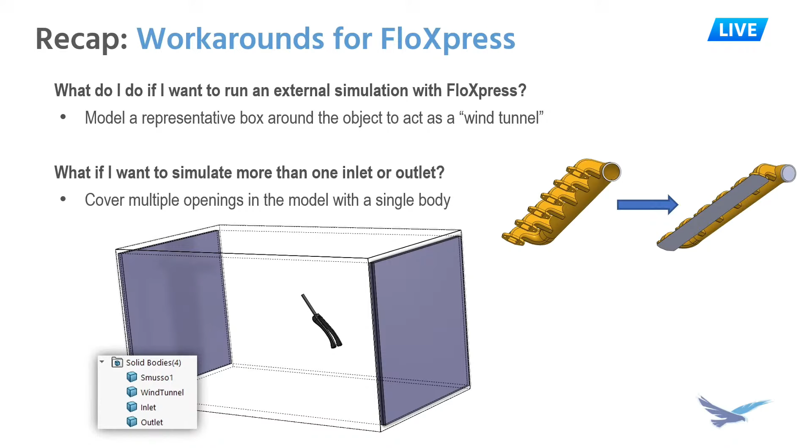All right, well I hope that was fun. So you can do all of that directly in SolidWorks, and every level of SolidWorks has access to it? Everyone, parts and assemblies too. That's impressive, awesome, thanks Damon.

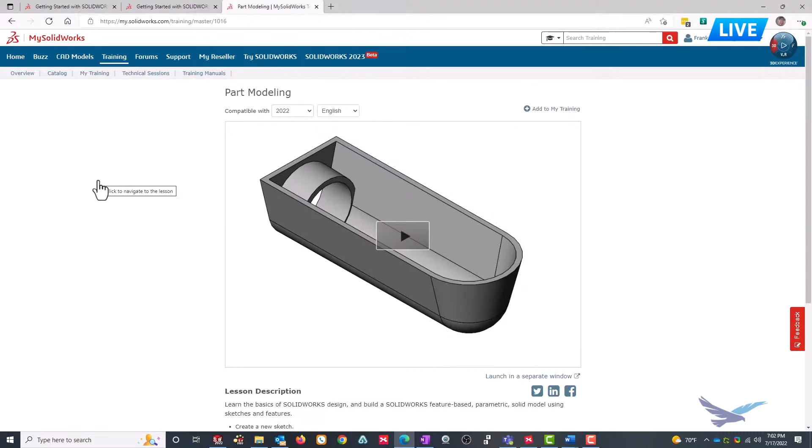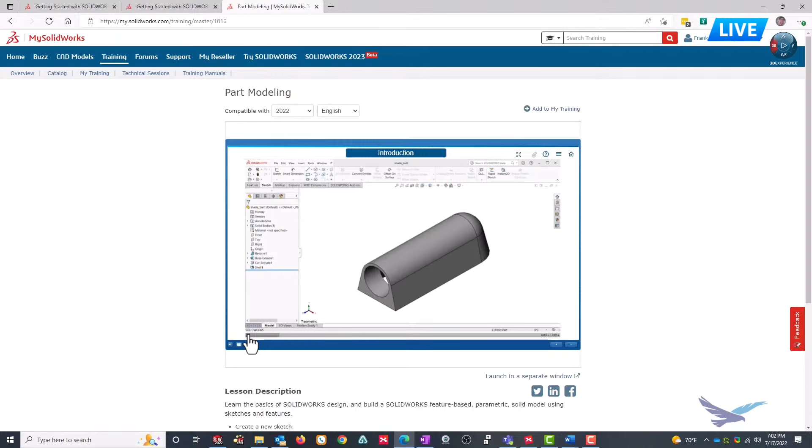This video opens up in MySolidWorks, and you can see at the bottom of the screen you've got the length in minutes and a little bit about this particular tutorial. So let's open it up. And just like that, about 3 clicks and you're in a tutorial. Pretty cool, right from your SolidWorks welcome screen. There are several modeling tutorials from basic to advanced, we'll take a look at some of those later.

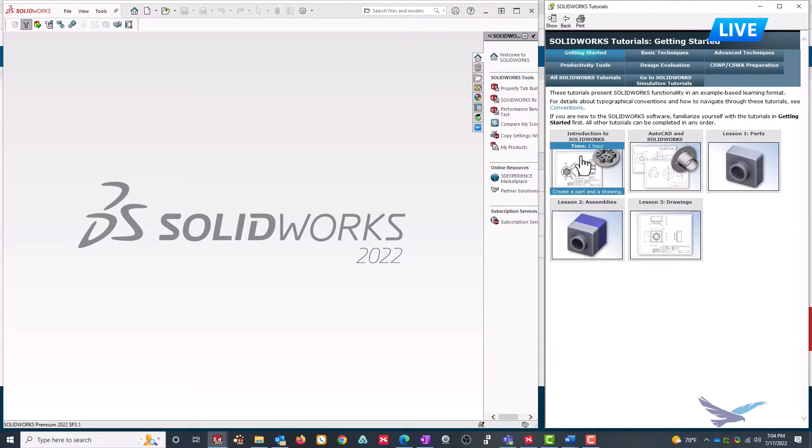There's also some great step-by-step tutorials right inside SolidWorks. You can click right there, or click on the help question mark dropdown and click on tutorials. These are pretty cool because they're installed with SolidWorks when it's installed. If that didn't happen, a quick modify install and you can put them in, or call us. This one is a clutch cover. Down at the bottom right, you can click My First Part.

This feature is really good. Check this out - if you click right on the little icon in the tutorial, take a look at what happens in your SolidWorks, it lights up that icon for you. This can take you right from beginning to your first part. We're going to click on a part icon, get a part template open, follow the instructions on the screen, then click the next button on the bottom right. That takes you to the next page of the tutorial.

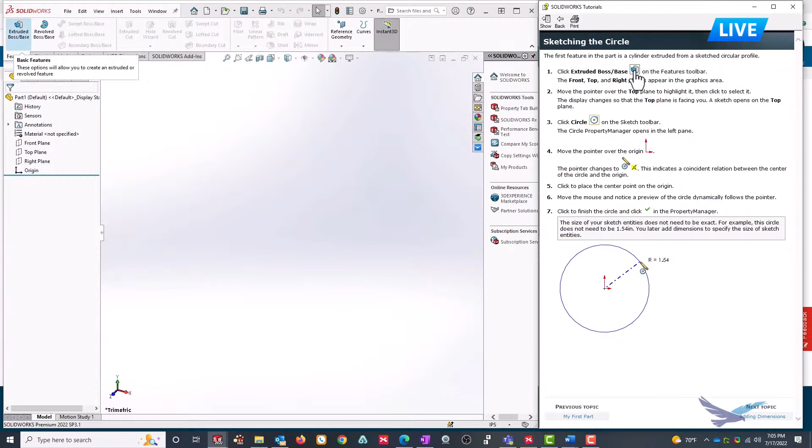Same thing here - if you click on the icon, it lights it up in SolidWorks for you. Extruded boss base - so then you can select your plane, follow the instructions, and continue creating your first part. It's pretty awesome. This little show icon shows the glossary or index of all the tutorials. It's massive, we've got all kinds of tutorials right inside SolidWorks.

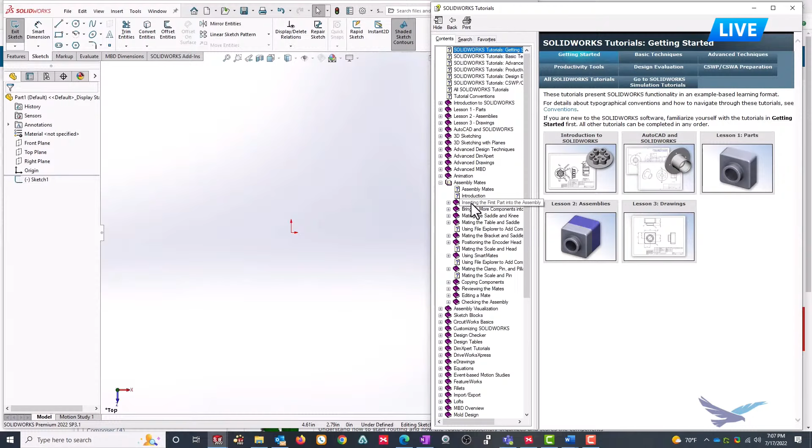You just need to click them open and get started. It's pretty cool, all kinds of topics from soup to nuts, even mouse gestures. So that's the SolidWorks tutorials right inside your SolidWorks. It's pretty awesome.

Say you wanted to learn a little bit more, Frank - we're going through a live stream on the YouTube channel. Is there anything on there that we can learn from? Oh, we've got lots more. Let's take a look, let's go.

So in the Hawk Ridge Systems YouTube channel, you can click on the Home tab. There's a little search button, and my favorite is the playlist. Look at this - this has got to be the gold standard for YouTube content for SolidWorks and the other software we sell, CamWorks, SolidWorks, MarkForged, simulation, you name it, it's all here. Please bookmark that playlist and click subscribe so you know about any new tutorials we put up.

And now we're going to get into the Hawk Ridge website. This is another gold mine.

Click on the support icon.

Now we've got the knowledge base. Every call we make, if we have an odd problem that we solve for you, we typically make a KB article on it so we can cover our bases for the next call. You're welcome to look at all of these knowledge base articles, and they're all made by your support team at Hawk Ridge.